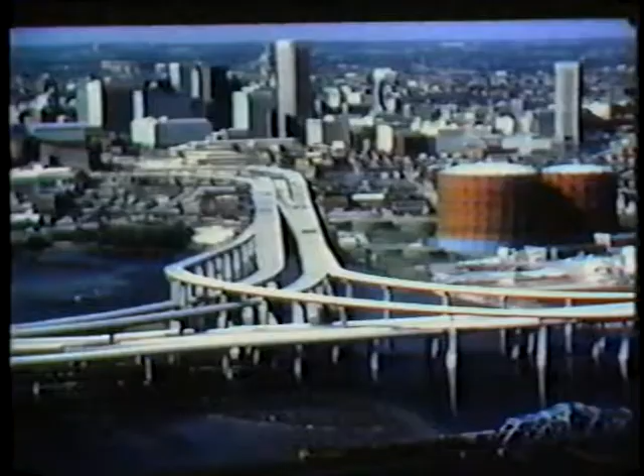Transportation is the lifeline of the American economy. Improvements in transportation of people and goods create beneficial social and economic changes. The cornerstone of the transportation system in this country historically has been the highway network, which contains nearly 4 million miles of streets, roads, and highways.

The interstate system is one of the largest public works projects ever undertaken and is estimated to cost $124 billion when the more than 42,500-mile system is completed. More than 97% of the system is now open to traffic.

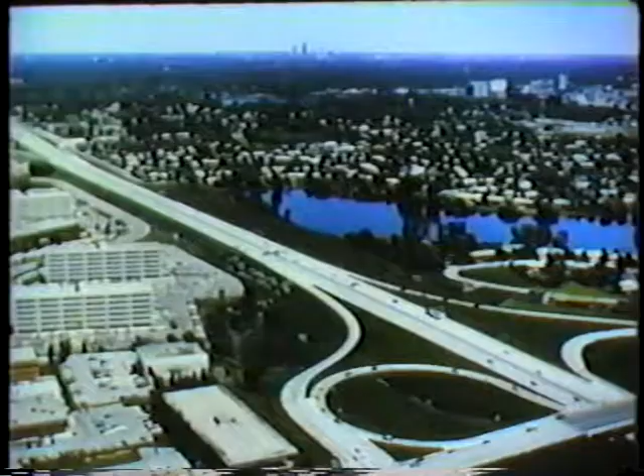The interstate system, while representing only 1% of the highway mileage in the United States, carries 20% of the vehicle miles traveled, as well as 30% of all the truck miles of travel. The importance of the interstate to movement of manufactured goods, commodities, and other products cannot be overstated.

In 1985, there were over 370 billion vehicle miles traveled on this system. On rural interstate highways, 17% of the vehicle miles of travel was by tractor semi-trailers or other combination vehicles. Combination vehicles are trucks with double or triple trailers.

With these increasing volumes of heavy traffic, what will it take to protect the tremendous investment that has been made in the interstate system? In this presentation, truck weights will be examined, for they are one of the most significant factors contributing to the deterioration of our highway system.

The presentation will explain how truck weights are considered in pavement design and how they affect our nation's pavements. We will discuss types of pavements, effects of the environment, use of truck data in design, and effects of increased truck size and weight. Four major elements affect the performance of pavements: the type of underlying soil called the roadbed soil, pavement structure including types of construction materials and their thicknesses, traffic loads, and the environment.

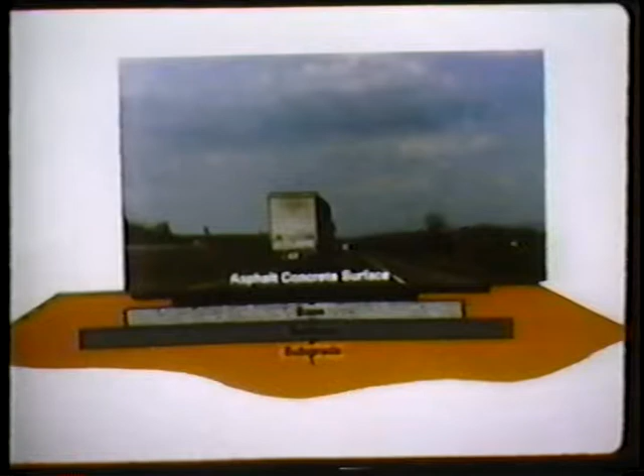Historically, pavements have been divided into 2 broad types: flexible and rigid. Flexible pavements primarily consist of an asphalt surface layer built on an aggregate base and resting on a compacted roadbed soil or on the natural soil foundation.

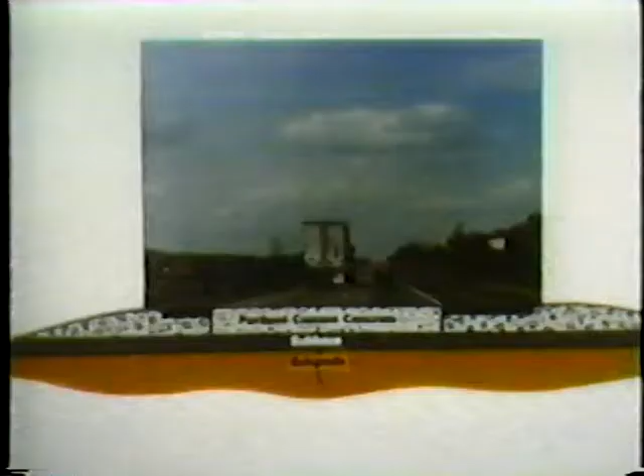Approximately 24,500 miles, or 58% of the interstate system, are flexible pavements. It should be noted that this information reflects the 1985 surface type and not the materials used in the original pavement construction. Rigid pavements are made of Portland cement concrete, placed on a sub-base. Rigid pavements make up approximately 18,000 miles, or 42% of the interstate system now open to traffic.

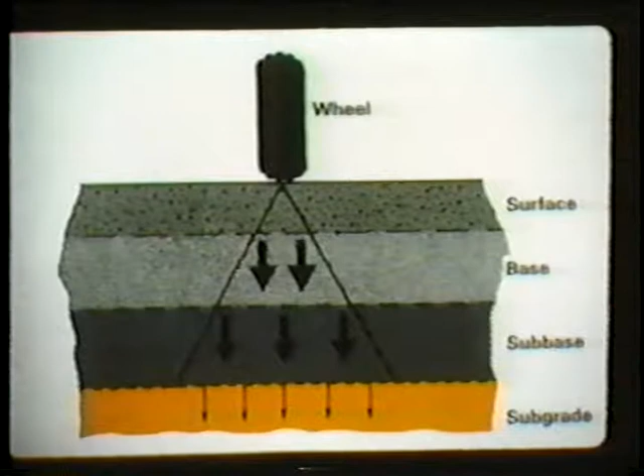The essential difference between the 2 pavement types is the manner in which they distribute the load. The material and thickness of each layer of the flexible or asphalt pavement are designed to distribute the load over a larger area. As the load stress is passed from layer to layer down through the pavement structure, it is reduced until each layer can adequately support the applied pressure.

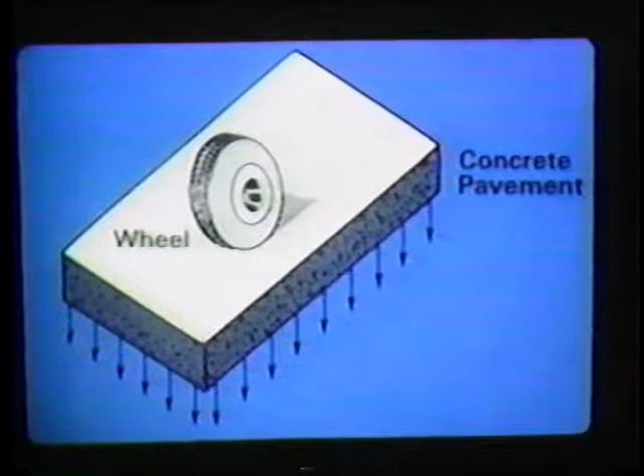A rigid or concrete pavement, on the other hand, functions more like a plank or a slab. Because of its rigidity, a concrete pavement tends to distribute the load over a relatively wide area and does not depend on a series of layers for load distribution.

With this background on pavement types, let's discuss the remaining 2 elements that affect short and long-term pavement performance, that is, traffic loads and the environment. We will discuss the environment first. Some research groups and transportation industry representatives have argued that the environment is the most important factor causing pavement deterioration.

Primarily, this is due to moisture, temperature, and freeze-thaw cycles that pavements are subjected to throughout their design life. These factors create internal stresses and material deterioration, thereby limiting a pavement's life. While the environment causes some pavement deterioration, a greater amount of damage is caused by heavy vehicle traffic.

A recent survey by the Federal Highway Administration has shown that much less pavement deterioration occurs in left lanes on multi-lane highways carrying high percentages of trucks. This finding further substantiates that it is repeated heavy vehicle loadings that are the primary cause of pavement deterioration.

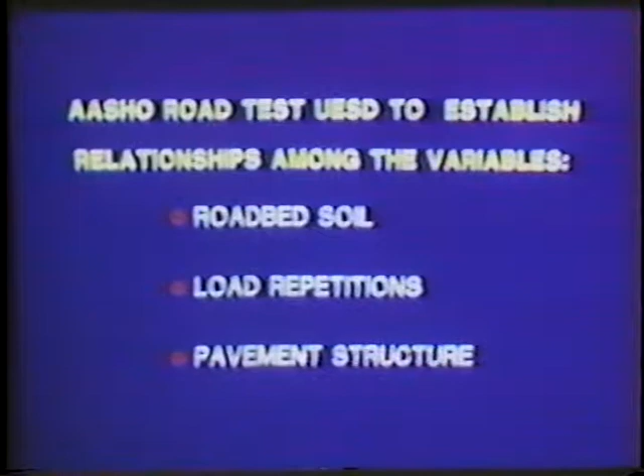While the road test was not able to evaluate all the variables in pavement design shown here, still it is the most comprehensive test for pavement design to date. Recently, AASHTO adopted a new guide for the design of pavement structures. This new guide contains significantly improved methods for pavement design and rehabilitation. However, the basic pavement performance concept developed at the road test remains unchanged.

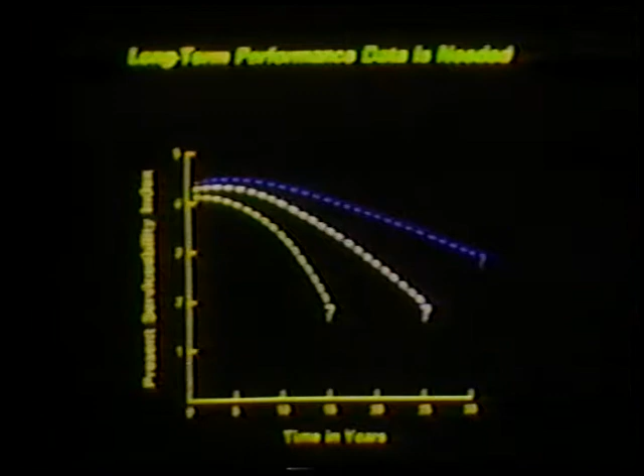For improved design procedures, good long-term pavement performance data are vitally needed. These data will better describe how pavements perform over long periods under a wide range of traffic and environments. In 1986, a long-term pavement performance study was initiated under the Strategic Highway Research Program. The monitoring effort includes approximately 2,500 test sites nationwide. This comprehensive study will enable highway engineers to improve design techniques and better define the relationship between truck loads and environment as they relate to pavement performance.

Now let us discuss how truck weights are considered in pavement design. Many people think that pavements are designed to carry a maximum size load. This stems from the fact that both the federal government and states have established maximum legal loads for highways and bridges. The maximum load is not necessarily the critical load. In design, it is not so much the maximum size load, but the combination of both size and number of loads applied to the pavement that is important. It is both the size and number of loads that determine the rate of pavement deterioration.

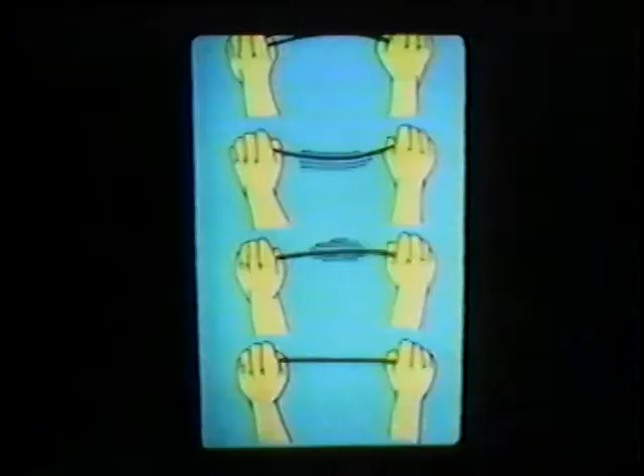While it is true that a single heavy load can cause failure, this load would indeed have to be very large. Pavements generally fail due to repeated applications of loads. This is called fatigue failure and can be illustrated by bending a piece of wire. The wire will endure a certain number of bends before it fails. The same can be said of pavements, namely that they absorb a certain number of bends before they fail.

For the selected design period, loads to be applied to the pavement are estimated. It is important that designers have as accurate data as possible. In making this estimate, the total traffic first is projected based upon historical trends. There are many factors that affect traffic growth trends: commercial and residential development in the area, vehicle capacity of the proposed roadway improvement, as well as neighboring highways, and the overall economy of the area.

Recent development of weigh-in-motion, or WIM equipment, enables better forecasting of future traffic trends. The WIM equipment allows vehicles to be weighed without leaving the mainline highway and while moving at normal operating speeds. The equipment provides gross vehicle weight accurate to about plus or minus 5%. Also, it can measure and record individual axle weights, axle spacings, and vehicle speed.

The mix of traffic or types of vehicles in the traffic stream are then identified. Using historical trends and other information, the mix of traffic is forecasted over the design period. For example, if the number of 5 or more axle trucks or their axle weights have been increasing over the past few years, that trend would be used to estimate the number and load of 5 or more axle trucks that will use the facility over its design life.

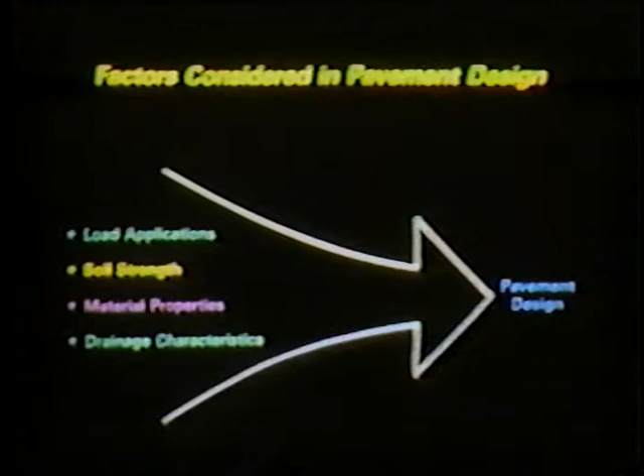Each load is converted into 18,000-pound equivalents using relationships shown in the AASHTO Guide for Design of Pavement Structures. All of these equivalents are then added to determine how many 18,000-pound applications the road will absorb over the design period. The number of applications is combined with other factors such as soil strength, properties of paving material, and drainage characteristics to determine the required design of the pavement structure.

The designer utilizes these factors as inputs into established design procedures in order to arrive at the pavement thickness. The importance of accurate cumulative truck weight data in the design process cannot be overemphasized. We have discussed how vehicle weights are considered in pavement design. Now let's examine in detail how individual vehicle axle weights affect pavements.

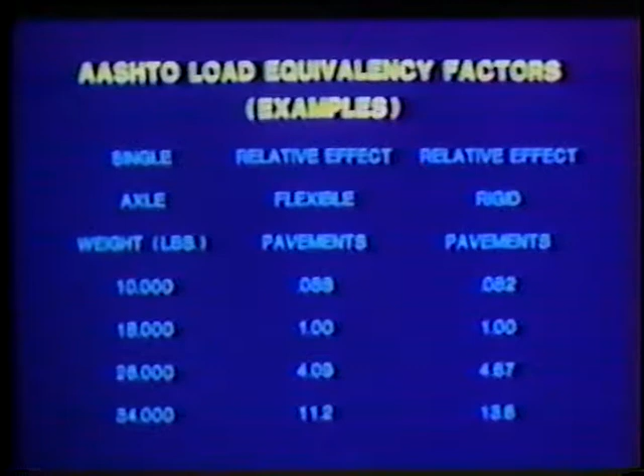How much relative damage does an 18,000-pound axle load do? The AASHTO pavement design procedure provides for a load equivalency factor of 1.0 for this load and uses it as a base. All other single, tandem, and tridem axle loads are expressed as factors in relationship to this common denominator.

Analysis of AASHTO data indicated that if a single axle load is doubled from 18,000 pounds to 36,000 pounds, the damage will increase from 1.0 to 17.12. That is to say, one pass of a single axle loaded to 36,000 pounds consumes as much of the pavement's design life as 17 passes of a single axle loaded to 18,000 pounds. Therefore, damage increases in much greater proportion than the increase in weight.

The 1974 Highway Act raised the single axle maximum weight limit from 18,000 pounds to 20,000 pounds, the tandem axle weight limit from 32,000 to 34,000 pounds, and established a maximum gross weight limit of 80,000 pounds. Let's take a look at what impacts this has on the roadway.

When the average single axle load increases from 18,000 pounds to 20,000 pounds, the damage increases from 1.0 to 1.57. That is to say, one pass of a single axle loaded to 20,000 pounds consumes over 50% more of the pavement life than one pass of a single axle loaded to 18,000 pounds.

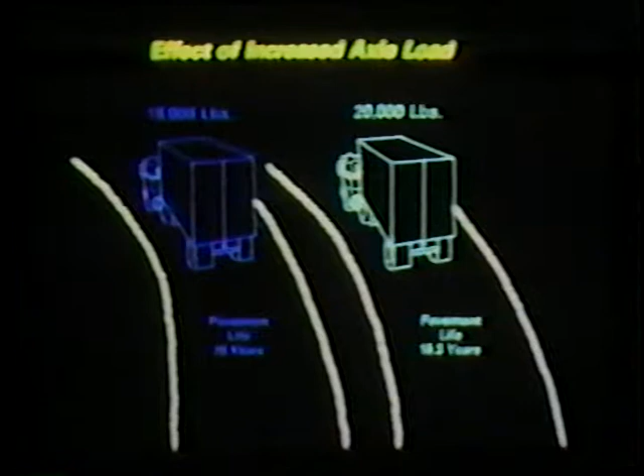This means that a pavement designed to absorb 10 million applications of an 18,000-pound equivalent single-axle load over a 20-year period would wear out in 15.3 years with the application of 10 million 20,000-pound axle loads. If you take into account that the same amount of goods could be moved in fewer trucks with 20,000-pound axle loads, the increased axle loads would cause the pavement to wear out in 16.4 years.

Let's look at tandem axles. This figure compares the damage of a truck fully loaded to the 1956 legal limit of 32,000 pounds per tandem axle, a truck fully loaded to the 1974 legal limit of 34,000 pounds per tandem axle, and a truck overloaded to the illegal weight of 40,000 pounds per tandem axle. There are significant increases in damage with small increases in axle load.

Also note that most of our highways were built to the 1956 limit, and weight increases of 1974 are contributing to their accelerated deterioration. The Surface Transportation Assistance Act of 1982 also had an effect on pavements by increasing the allowable length and width of truck trailers. The increased trailer volume allows more cargo to be hauled, and thus heavier axle loads to be applied to the pavements.

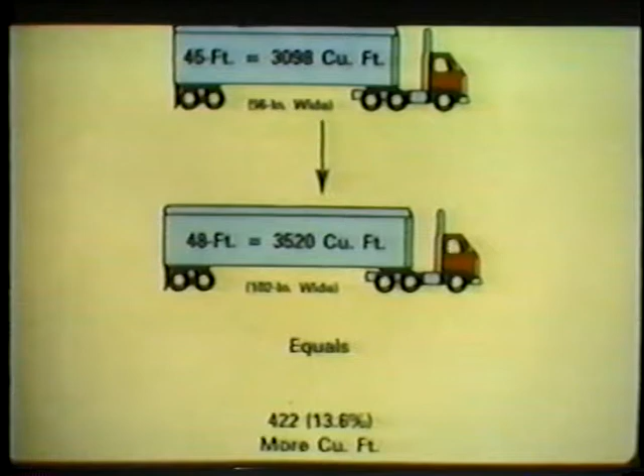It is these heavier axle loads, as well as number of loads, that are of concern to pavement engineers. Several bills have been introduced in Congress over the last few years that would result in an increase in average truck axle weight. One such proposal calls for removing the vehicle maximum weight limit of 80,000 pounds and letting legal axle weight limits control. Let's look at the effects of removing the maximum weight limit.

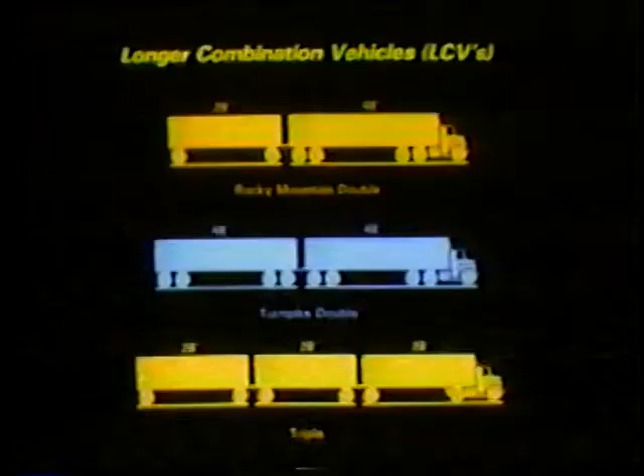First, there will be increased use of a new generation of trucks. The 1982 Surface Transportation Assistance Act allows tractors with two 28-foot trailers, called Western doubles, to operate on all interstate highways and some primary highways. Longer combination vehicles, or LCVs, which can now operate in certain states, will be used more frequently if the weight cap is removed. These LCVs include the Rocky Mountain Double, the Turnpike Double, and the Triple shown here.

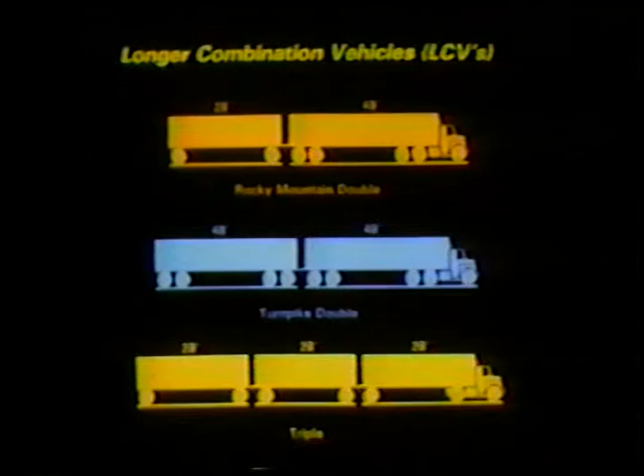One way to illustrate the damage done by the various truck configurations is to determine the number of 18,000-pound equivalent single-axle loads, or ESALs, each truck type applies to the pavement to carry 1,000 tons of cargo. Of course, this will require several trips by each type of truck. It is assumed that the gross weight cap of 80,000 pounds has been removed, and trucks are loaded to their highest practical operating weight. The use of Western doubles with their single axles applies the most number of ESALs, that is, 175 for each 1,000 tons of goods moved.

The use of triples applies 163 ESALs. The use of Rocky Mountain doubles applies 144 ESALs. The use of conventional tractor semi-trailers applies 134 ESALs, while using turnpike doubles applies 80 ESALs. In other words, different truck configurations cause varying levels of pavement damage while carrying the same amount of cargo.

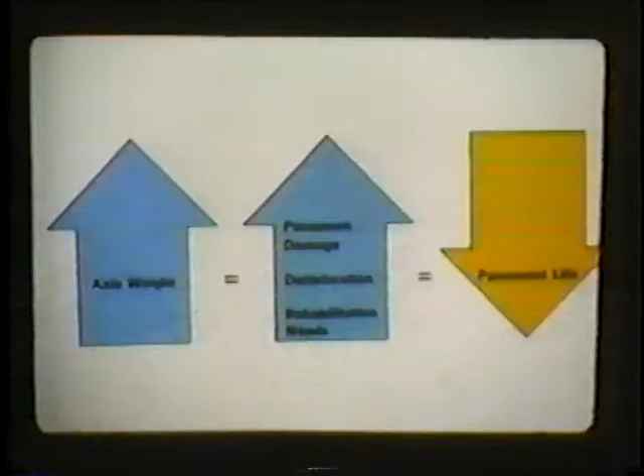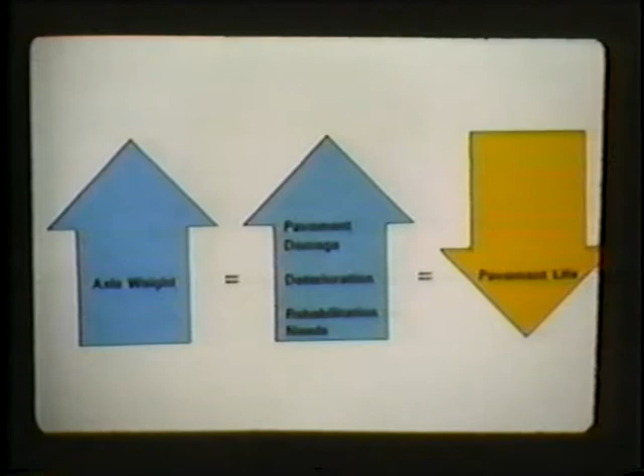The importance of accurate truck weight data in pavement design has been discussed. Also, the large impact of increased truck size and weight has been illustrated. From this discussion, it is apparent that the strict enforcement of the congressionally mandated weight limits on the interstate system is essential in order to preserve the pavements. The important point to remember is that even if all other factors remain the same, as axle weight increases, the amount of pavement damage also increases, and the expected pavement life decreases. This resultant pavement deterioration substantially increases the need for additional rehabilitation funds.

Realizing the potential damage to the nation's highway system caused by increased axle weights, former Federal Highway Administrator Frank Turner has proposed a new generation of truck that would cause less pavement damage by controlling axle weight while allowing heavier gross loads. Under the Turner proposal, the single axle maximum load would be reduced from 20,000 pounds to 14,000 pounds, and the tandem axle limit would be reduced from 34,000 pounds to 24,000 pounds. The vehicle gross weight would, however, be allowed to increase from 80,000 pounds to 105,000 pounds.

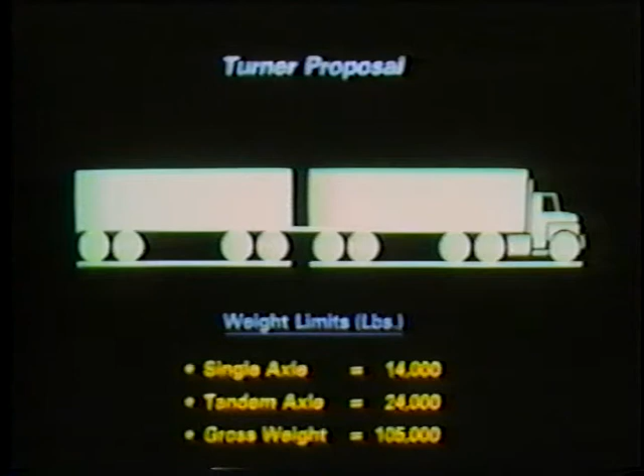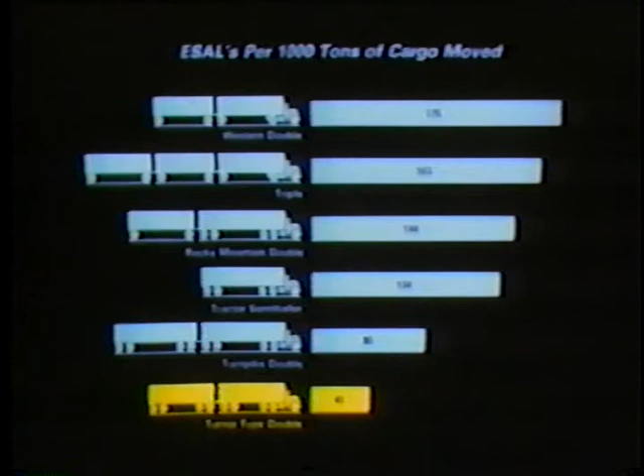The number of ESALs applied to the pavement to move 1,000 tons of cargo would be reduced to 40. This is more than 3 times fewer ESALs than for the conventional tractor semi-trailer to move the same amount of goods. By the way, the Transportation Research Board conducted a preliminary study of this proposal. This study estimates that allowing truckers to exceed the 80,000-pound gross weight limit while reducing axle loads as indicated in the Turner proposal would result in $250 million reduced pavement damage annually. At the same time, it would result in substantial economic benefits to truckers. A more detailed study of this concept is underway.

This presentation only discusses how truck size and weight are considered in pavement design. There are several other factors that must also be considered when comparing truck configurations, including economic trade-offs, safety, operational considerations, and the effects on bridges. The challenge of the future is to reach an equitable balance between reducing the cost of transporting goods and providing safe and cost-effective highways. Transportation costs have been reduced, and this nation's economy has benefited greatly from the improved operating speeds and from increases in the weight limits on the interstate system.

Our future policy position on proposed changes to the existing size and weight limits must be based on a careful analysis of the nationwide costs and benefits of the proposed changes, while maintaining responsible stewardship over our highway system.